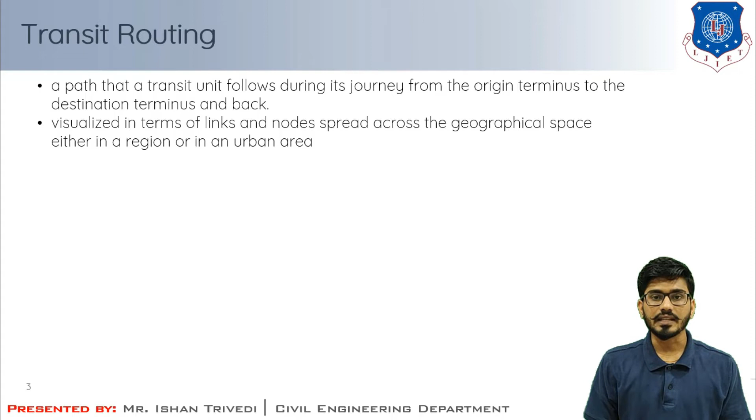For small cities, a single route connecting the employment and commercial activity centers with the residential area may be sufficient. However, with the increase in size, there is a need for a number of intersecting, or you can say parallel, routes, leading to the formation of a route network. So if the city has expanded, there may be a potential need for another route, and that's why, by parallel routes or some other network, there will be a need for different routes, and these can intersect, which ultimately leads to the formation of a route network.

Talking about route planning principles, there are some basic route planning principles. For example, a transit route should be aligned along the major activity centers to ensure adequate ridership. You need to define a route in such a way that there will be ample ridership from those who are going to use the route and the facilities provided on it.

For example, the BRTS corridors in Ahmedabad and Surat have their ridership, and based on that the route has been finalized. Not only the BRTS, even the local municipal buses have their own routes, and based on the residential area and the commercial potential, they decide which route or path has to be followed for that particular origin and destination journey.

A transit route should be as short as possible, preferably not more than 30 km, or you can say 2 hours of round trip. The transit route should be direct and should avoid circuiting, which results in an excessive rise in travel time. The transit route should be compatible with the existing road network, and we have to utilize that road network, or channel of movement, in that area.

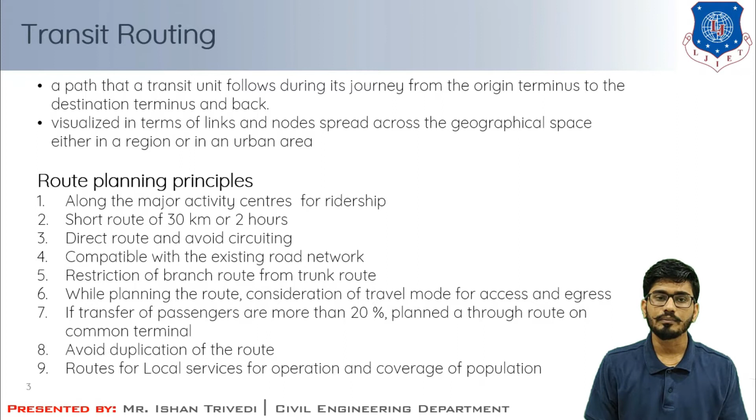Now we are going to discuss route classification. Based on the service type, routes are classified in three parts, that is fixed routes, semi-fixed routes and demand responsive routes. Here, fixed routes are planned where the transit service is fixed in space as well as time dimension in the service area.

Means they have their own specified origin and destination, and for this specific origin and destination they follow the time schedule. If I'm talking about the AMTS bus and the BRTS bus, both have their origin and destination in that route. They follow a particular time schedule for their journeys.

Now when I'm talking about the semi-fixed type of route service, these are provided when a partial deviation in terms of either space or time or both is allowed. Demand of special groups like elderly people, school going children, pilgrims, etc. These routes are of semi-fixed type in services.

We have heard many times that the government or the state government provides extra buses for pilgrims. There is an extra train for the pilgrims. So they have their flexibility in terms of space or time.

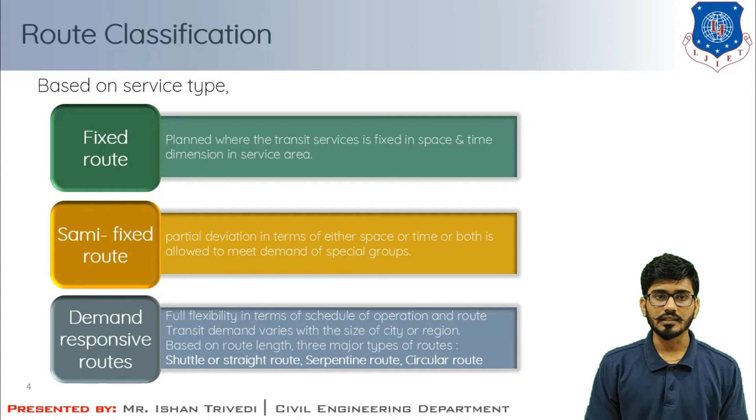Transit demand varies with the size of city and the region, and based on the route length there are three major types of routes which are planned in the region. These are shuttle or straight routes, serpentine routes and circular routes. So let us understand these routes in detail. First is shuttle routes. These are suitable to meet the short-term peak hour demand along a specific corridor without frequent stops and with high frequency of transit units.

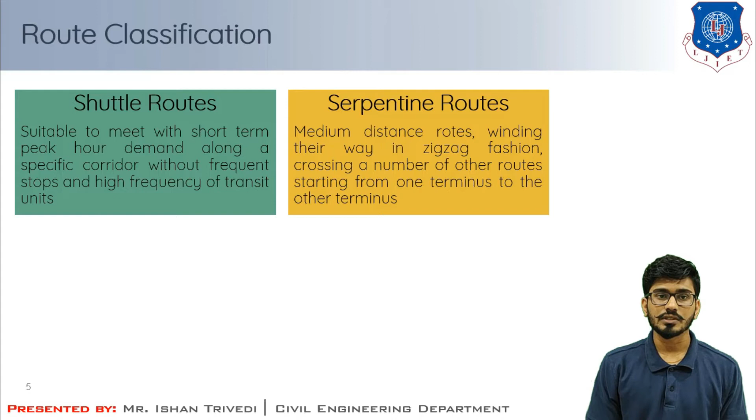Next is the serpentine routes. These are medium distance routes winding their way in a zigzag fashion, crossing a number of other routes from one terminus to the other terminus. These routes pass through the residential areas as well as the business and commercial activity areas to provide essential transit connectivity, resulting in longer travel time and delays.

And then we have the circular routes. These routes originate and terminate at the same terminus. Such routes become necessary for medium cities and metropolitan cities to provide direct connectivity between the outlying areas.

Services on these routes are operated in the clockwise and or anti-clockwise direction, which ultimately reduces the dead kilometerage. Circular routes offer the flexibility to the passenger to travel in either clockwise or anti-clockwise direction. However, the journey time between diametrically opposite ends may increase considerably because they cover the entire circular route of the corridor, and that's why they require a longer time than a single one-way journey.

Here the balloon type of circular route is famous, and that follows a one-way route within the outer portion. Two-way services are also provided on the rest of the routes.

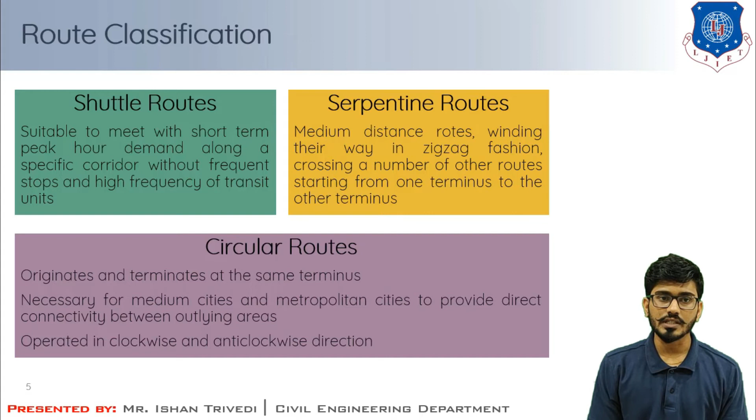Now let us understand a few terminologies regarding the corridor. So first, what is a corridor? A corridor is a broad geographic band connecting population and employment centers, served by various transportation modes, within which passengers and freight travel. Land uses, topography, environment and other characteristics are evaluated for transportation purposes.

Here one example has been shown: the photograph of the Ahmedabad BRTS and its corridor. It is in various phases. Phase 1, phase 2 and phase 3 is proposed. You can do further study on the BRTS case study, particularly of the Ahmedabad city area.

You will have the basic idea about this system, how this system has been implemented, how the route choice has been done in phase 1 and phase 2, and how they came up with the route with basic characteristics, thinking about the futuristic demand of this particular route. There may be overlapping of certain routes, and how they eliminate certain problems, how this geometry has been determined. All these things we need to understand through this case study.

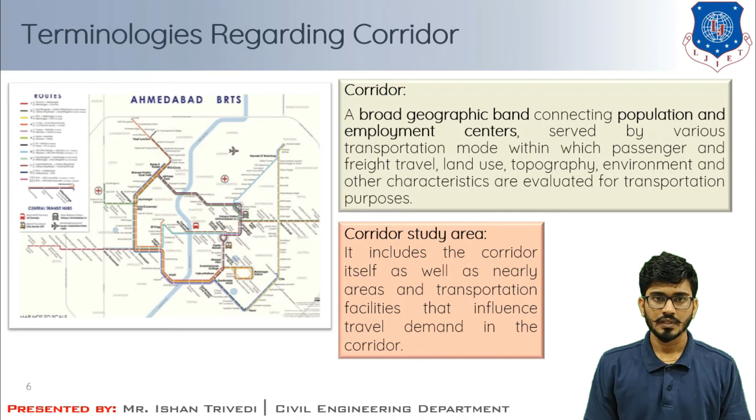Furthermore, in these terminologies there is another term, that is corridor traffic study. A corridor traffic study includes the collection of all the traffic data that are used for the forecasting of all the links. Why do we require this data? This data determines the present picture of the land use characteristics and how the behavior of individuals depends upon the land use, whether it is a home based trip, a work trip or another non-home based trip. So we need to find out the socio-economic characteristics and other relevant data

based on the requirement of the corridor. Then after that we will do the forecasting of all those relevant links that we have identified for the corridor development, and in that link the number of traffic lanes is computed on a particular roadway, and the analysis of various transportation alternatives is also captured in that traffic study.

Then we have the corridor traffic forecasting. This process of forecasting is done for determining the number of traffic lanes required in the corridor to meet the future traffic demands, and that's why we require this forecasting. You need to understand, after providing the corridor there will be a change in the land use and there will be potential in that corridor, so you need to forecast the traffic such that in future, if the potential increases, the number of trips increases and there will be congestion in the particular corridor. So you need to neither over calculate nor under calculate in this forecasting procedure.

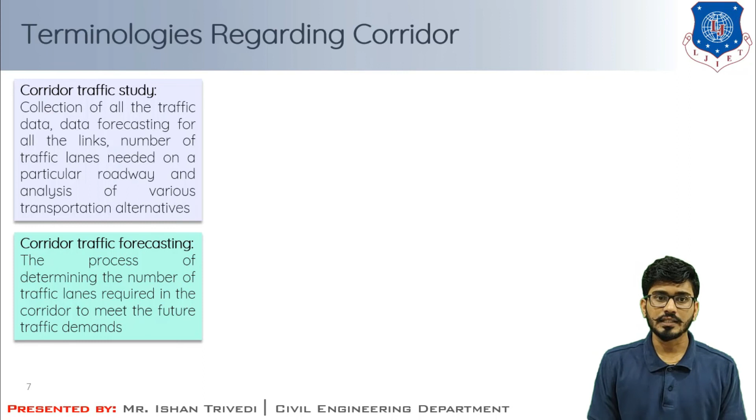Then there is corridor management. The term corridor management refers to the practice of identifying and implementing a mutually supportive set of strategies to maintain and enhance the access, mobility, safety, economic development, and environmental quality along the transportation corridor. As I told you, you need to understand the potential of the corridor, and it has to be integrated with the other transportation and how they come up in the future. So we require corridor management for its effectiveness and sustainability in the transportation system.

To achieve this corridor management, we need to provide the corridor management plan. This corridor management plan is the coordination of the land use activity within a linear area, and it is nothing but transit oriented development. A corridor plan focuses on the integration of transportation routes and the surrounding linear area like open space, water courses and other land use. Here you need to develop certain strategies, because after this corridor development there will be change in the land use and there will be linear development along the corridor. So you need to understand the types of strategies included in the corridor area plan.

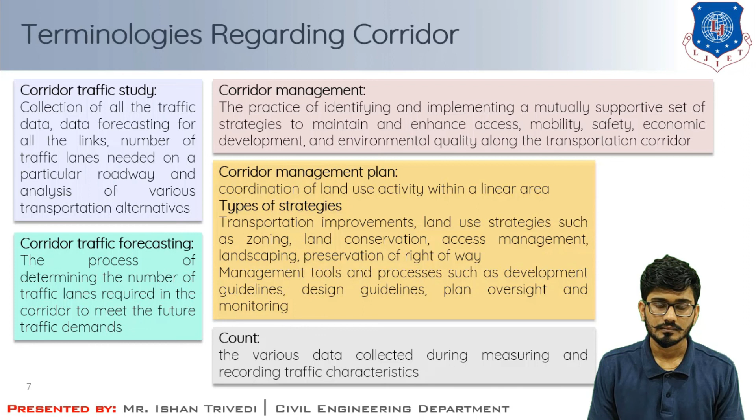Now next is the count. These are the various data collected while measuring and recording traffic characteristics such as traffic volume, speed, weight, modes, or a combination of all these. So these are the basic terminologies of the corridor. I am ending this session here. I hope you have learned the basic concept of transit route and the terminologies of corridor.